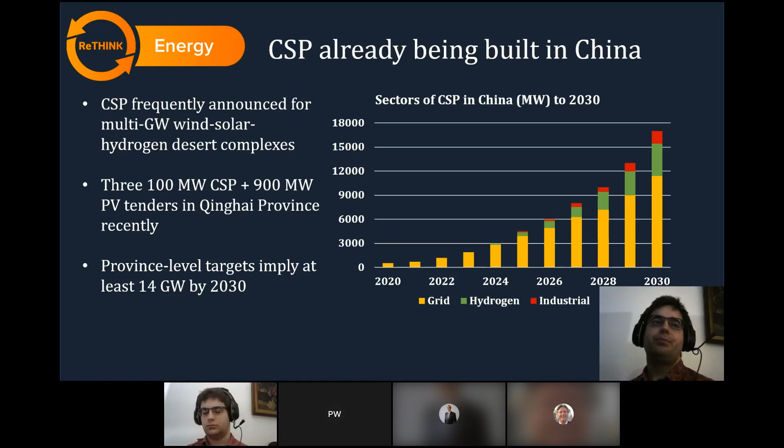in the world, as we reach 45 gigawatts by 2030, I think the grid demand will continue to be the single biggest source. But I do think that the other 3 types, the microgrid, the hydrogen, and the industrial, will become significant in the later part of the decade, and especially the 2030s. And obviously, dispatchable renewable energy is at its most valuable in grids that no longer have a huge amount of coal and gas, and in grids that have a lot of intermittent renewables.

But I actually also think that even a place like Iran could have some renewables, because they will have Chinese investment. And the Chinese developers, the pilot projects that the country ordered to be built a few years back, those pilot projects have finally been completed.

And so what China now has is a few CSP development companies that have a solid supply chain, that know what they're doing, they have experience, they have finance, and now they're expanding beyond China's borders into places like Thailand and Crete and Cyprus, and Chile, of course, and the Middle East.

So this 45 gigawatt figure is pretty certain, really. Spain has another 5 gigawatts that's more or less baked into the cake now because it's a government target. And Chile, I'm not sure if it has a specific government target yet, but what it has is just this incredible mining industry, incredibly hungry for electricity, best CSP resources on the planet. They're building lots of renewables, especially solar, so overnight energy storage will be immensely valuable there.

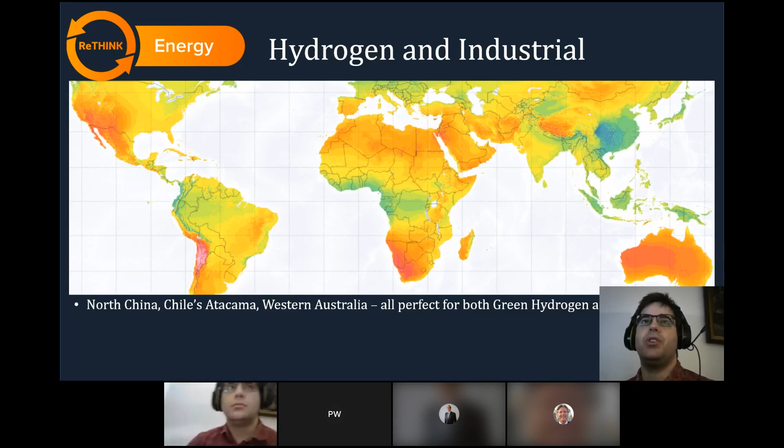But while we're looking at this map, you might think that it's only the yellow that's suitable for CSP, and probably this map is not a perfect guide, because I think places like Florida, probably not ideal for CSP, because while it has good average DNI, it probably has seasons where it has a lot of cloud cover. So this map isn't a perfect guide, but there's even been a CSP plant suggested for Thailand, which is pale green here. So if they can do it in Thailand, they can and eventually will do it in Brazil and in Gujarat in India, places like that. So a lot more than you would expect, a lot more variety.

And another thing to point out is that it's really not the same as batteries. The thermal storage that CSP brings to the table scales far more easily. It's not the main cost source. Batteries will run into issues with the easily available lithium being dug up already, and then a lot of that has to go to the EV market as well. And we've already seen 17-hour storage using molten salt, but that's going to be scaled to 48 hours, I'd expect.

Well, that 48 hours is a figure I heard from a startup that wasn't willing to describe how they were planning to achieve that because they didn't want their idea stolen. But certainly we will go beyond 17 hours where it's relevant and useful to do so. So it really cannot be compared to batteries. It definitely has a clearly defined niche apart from that.

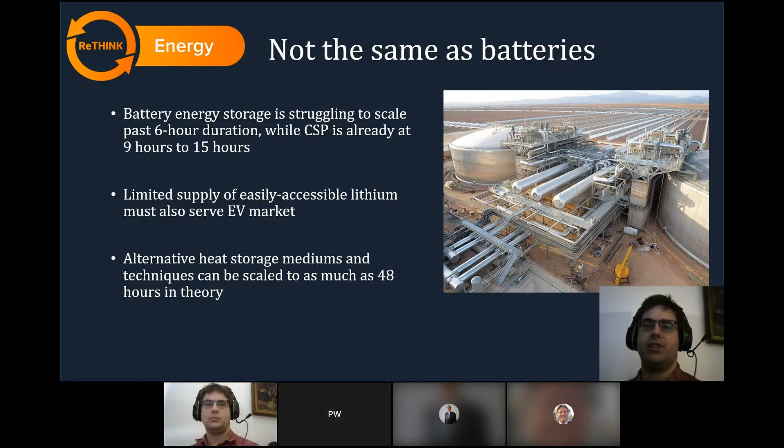So we've got some more topics which are more important, actually, some very spicy stuff like the Generation 3 CSP that's 1,000 degrees. And LCOE declines are really the most fundamental. So we're going to speak to some CSP startup CEOs to go over those next. So that's just the introduction there.

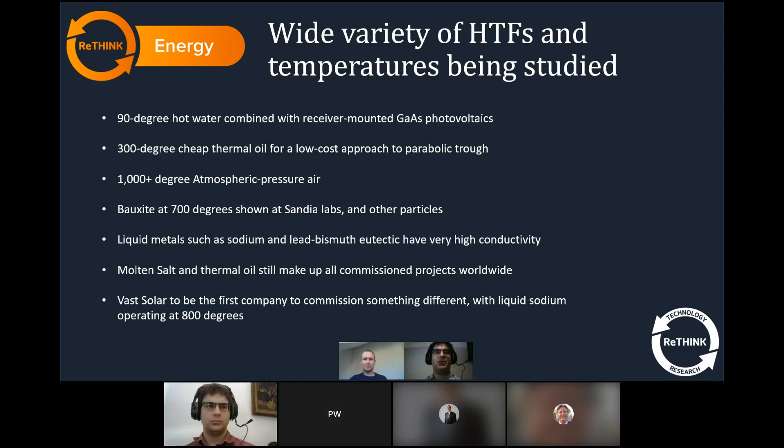So if you want to seize control of the screen now and show me some of your slides, that would be much appreciated. The difference in the system that we have developed is not in the generation. We're using just a standard Rankine cycle turbine. It's not in the storage. We're using a standard 2-tank hot and cold molten salt storage solution. Really, all of the difference in our system is out here in the collection.

And the fundamental change that we've made is that if you think about a parabolic trough plant where you've got thermal oil, which is limited to 400 degrees, we've instead perfected the use of liquid sodium metal as a heat transfer fluid that replaces the thermal oil. Now, the sodium has a couple of very advantageous benefits, one of which is it has a very wide operating temperature range. So it freezes at about 97 Celsius and it boils at about 883 Celsius. Which means that there's an ideal temperature range with a large margin for error either side of what you need to operate to pass heat back into the molten salt system.

And then the other benefit that's really critical is that the conductivity of liquid sodium is roughly 2 orders of magnitude higher than that of solar salt. And what that means is we're able to recover from a freeze if we have one in the solar field. And that's really critical. In our estimation, one of the major reasons why central tower receivers have all of the salt in one place is to manage that freeze risk, because if you have a freeze, it's really very difficult to recover.

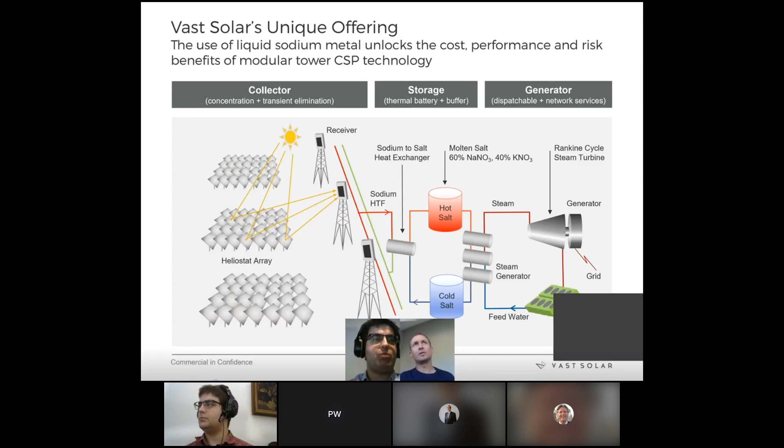On the topic of the grid participation, I mean, you're off in northeastern Australia. I think the place you're building this Mount Isa project of 50 megawatts, it's not even connected to the national grid yet, is it? No, that's correct. So Mount Isa, it's an isolated mini grid. There's about 400 megs of generation and about 330 megawatts of load. So it's not grid connected, and that's been one of the challenges and the opportunities that's informed the project that we've developed. So the project is, as you said, a 50 megawatt generation system.

But in order to connect into that mini grid, any generator has to be able to supply energy that is continuous. So it's not good enough to simply have a PV plant with a battery, even if it is coupled to a CSP plant, because you do still get periods of time where there are clouds, you get bad weather days, and you also get things like turbine outages for maintenance, and you need to be able to cover those. And so the system that we're taking through to FID next year is actually a 4-technology hybrid, where all of the generators are dispatched to fulfill different roles.

The CSP is configured to have 14.5 hours of thermal storage. So the thermal battery charges during the day and discharges at night. The PV provides daytime energy, but it needs to be firmed by a battery because PV's pretty ordinary when you're trying to achieve 99.5% reliability, as well as servicing a flat load. And then the main site is connected via a transmission line back to the original power station site that services the Mount Isa region, and we have a bank of gas engines located there. So those 4 assets are dispatched as one system to provide the high reliability solar baseload hybrid that allows us to provide energy to power underground mining and minerals processing operations.

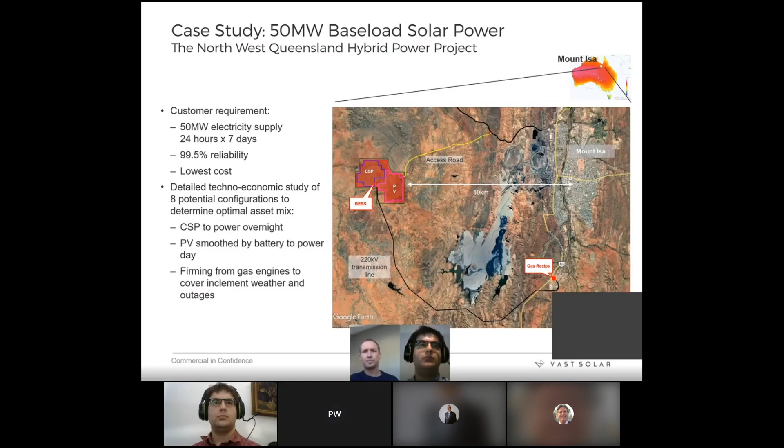So that's the end of Craig Wood's interview. I'm seeing a question about his technology, which I think I can answer at the end, but sadly he's not with us today because he's in Australia, like I said. The next one is going to be from John Ingram, who is with us. And I didn't introduce him properly when I was recording this, so I'll just say a few words before I bring his recording on. He is the CEO of a startup whose manufacturing is located in the Ukraine, because they have a lot of scientists working as taxi drivers, basically, so it's easy to employ them on the cheap. But he's an American, and I think he's building his production line right now. But I think we covered that in the video, so I'll just put it on.

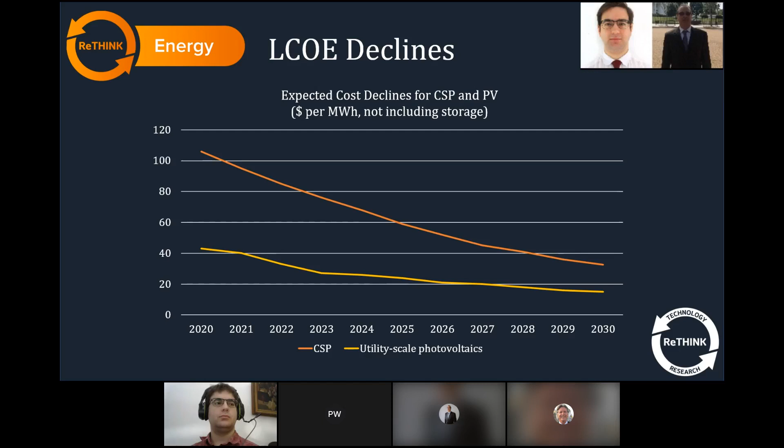So, materials get more difficult. Storage certainly changes its nature from sensible heat storage to molten, which we know is effective, if not cost friendly. One of the things we've done is really look at the hardware and how it's done, and that really comes down to the base collector itself, the parabolic trough in our case, as well as the receiver. And we've taken a radically different approach to the receiver, in which we reduce the cost to about 1/10 of a typical glass insulated vacuum sealed receiver.

So that's one aspect. Our energy storage, which we almost always look at 24 hours minimum. And you want to do that not as a short picture, not as serving in an evening, but we look at it as levelizing through the year, so we can get better utilization of our turbines or whatever the downstream is. Because let's be honest, it's a very intermittent source. Even though it's quite predictable, it's up and it's down. And if you look at a distribution hour by hour over a year of solar insolation, it's quite varied.

The balance of system obviously goes along with that 300 in a way. So a lot of our components become cheaper and simpler as long as you control that temperature. And having chosen that temperature, it really has to do with applications, right? There are few applications, concrete, steel, and others, where you absolutely need those very high temperatures, and we're not looking at that market. And if you need those, then you're probably going to pay whatever the cost is. So setting those few applications aside, the thousands of applications which are left are quite applicable to 300C and less.

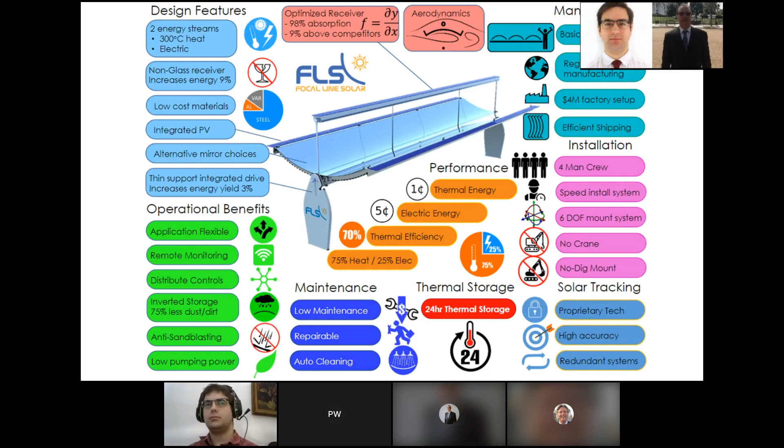So, Mark, just talk us through some more of the other ways that you're going to reduce this LCOE on this graph. Right. So you can see that I'm representing some changes and some cost reductions as being minor and some as being quite significant. And this is all relative. So the main point is that a lot of applications, especially direct thermal applications, you're going to be looking for the cheapest heat source that you can find. And having high temperature isn't really going to benefit you because it's going to drive up your cost.

And so what I've tried to represent is that these cost methods and avenues we use to reduce cost are approximately going to bring the cost down by about half compared to a system which was really not optimized for that. And this is the cost of heat energy in this case. It's CST. Now, of course, you can convert that to electricity, and we certainly will be doing some of those applications as well.

So, hardware being much cheaper, a lot of that does come down to the two main factors: being factory assembled, and the labor is very cheap in that way because it's processing quite quickly, and using that different style of receiver, which isn't prone to breaking, and it's very high in performance as well.

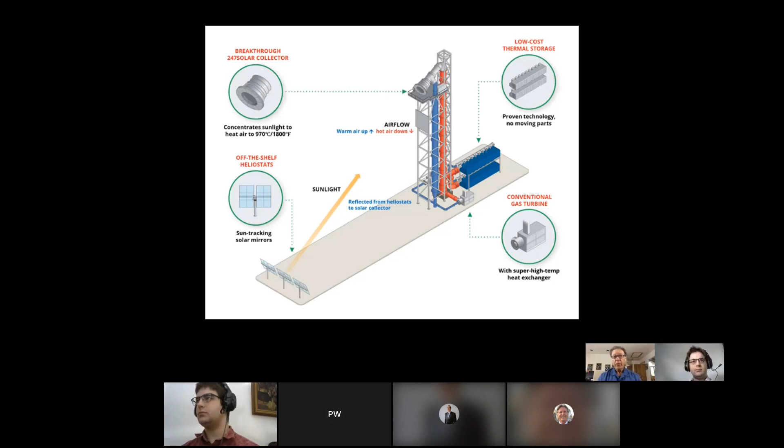Well, our whole idea for this is modularity, which is also true of, for example, Vast, who's on this program, and there are other companies as well who finally figured out that wind and PV and batteries got it right. What you do is standardize a product, you put it all in the factory, and with mass production, you get cost reductions like we've seen, again, with PV, wind, and batteries.

Trying to do that with conventional CSP, where they're huge power plants, and they use very sophisticated materials, and like you said, heat transfer fluids like molten salt and HTFs and all kinds of things that really add to the complexity and cost. The whole idea with energy of any kind is cost. You got to get your costs down. And modularity and mass production is the combination that gets costs down.

What is the really difficult part of your thing that sort of prevents others from just hopping on it all at once? Actually, that reminds me of a related question: to what extent is this purely an American invention right now? Because I really haven't heard of it except from you and Heliogen, and it always seems to come up from Sandia Labs or NREL, other American institutions.

It's actually a globally developed system concept that, frankly, only happens to have occurred in the United States, but it's a global concept. We had a very, very tight collaboration with both the DLR and the Fraunhofer Institute in Germany, for example, on the development of the receiver. And Worley Parsons, which is originally an Australian engineering company, global company, was also instrumental in the design of this system.

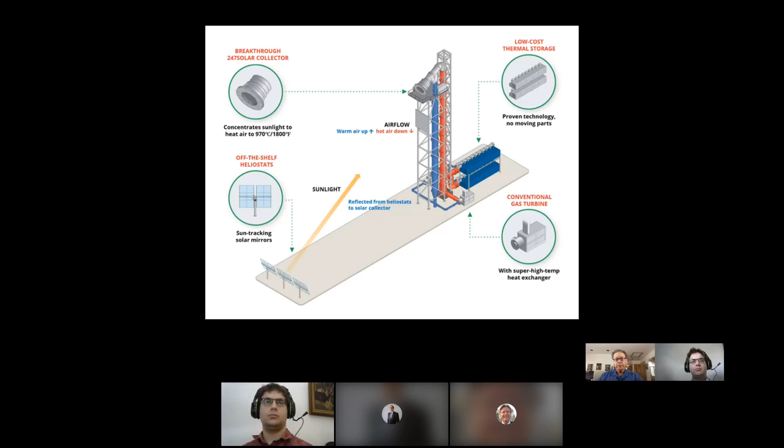Before we dive into the questions, is there anything you'd like to challenge from what you've just seen? No, I think a lot of the comments and a lot of what they said is quite accurate and on spot. And some of it most certainly is technologically oriented, right? So what's true for one technology isn't true for another, and for one application the same. So in some applications that's great and necessary, and in others it's really a different approach. So I don't have an argument with anything anyone said. I think they're right on spot.

Great. And yourself, Mr. Anderson? Call me Bruce.

No, I thought I was really impressed by the other presentations, and what it speaks to is both the creativity of the human mind, as well as the broad ways in which the sun can be used to solve our problems. There's no lack of imagination, no end to the possibilities, and all these ideas give me hope for the future.